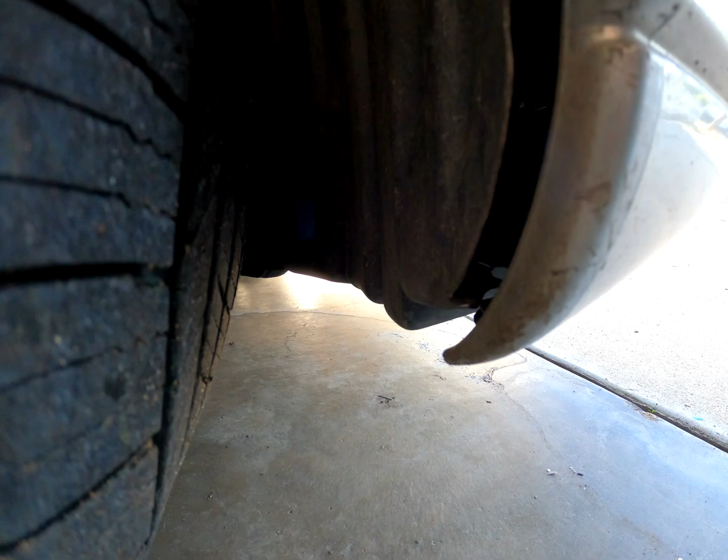That's the sound of the compressor. You can't even hear it from inside the car, but it vibrates and shakes everything. So I'm going to take a look at those bushings and replace them, because you shouldn't feel the whole car vibrating when that compressor kicks on. We'll see what those look like.

Okay, I've removed the passenger side headlight, and here you'll find the dryer and then the compressor. Now, if you look at this, that is a problem, because the bushings are totally shot. That's why we're getting the vibration inside the car, and that's why we can hear the compressor turn on. The solution to that is 3 of these.

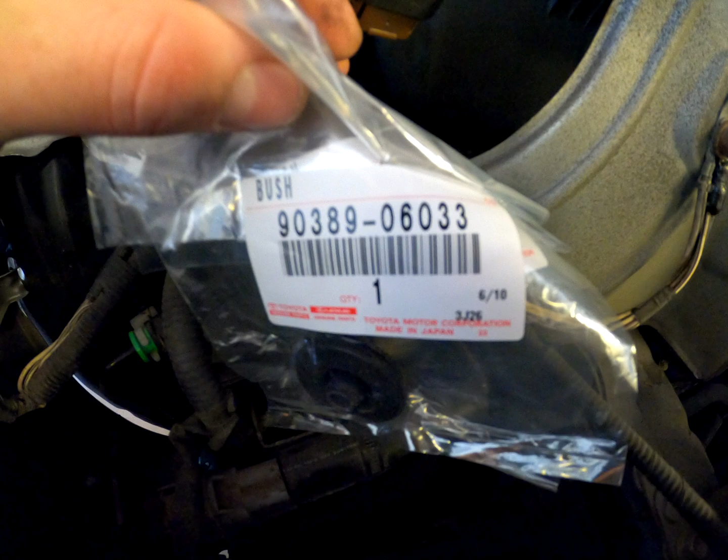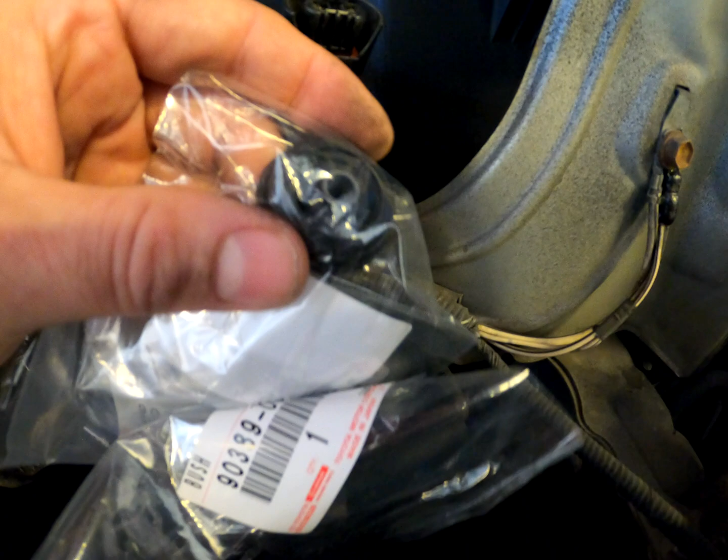Part number 90389-06033. These are available on a wide variety of Toyota cars and trucks that have air suspension. Just a nice bushing here, and obviously over time they're just going to fail and collapse. So this, like my channel and all my cars that I fix, it focuses on little stuff like this that nobody else is really going to care about or know or even realize there's something wrong. So there's something wrong here, we got to fix that.

So this will kind of be a 3-part video. We're going to knock out this, we're going to do the rear suspension, the air struts, and also the charcoal canister under the diff. So that'll be fun.

Now there are small O-rings here, I've got 10 of them here. Part number 90301-04011. These O-rings are for, you can't really see it on here, but there's a, actually you can't, it's this little thing right here. Hang on, let me grab, I don't even have a light. Hold on, let me get a light and I'll kind of show you what that's for.

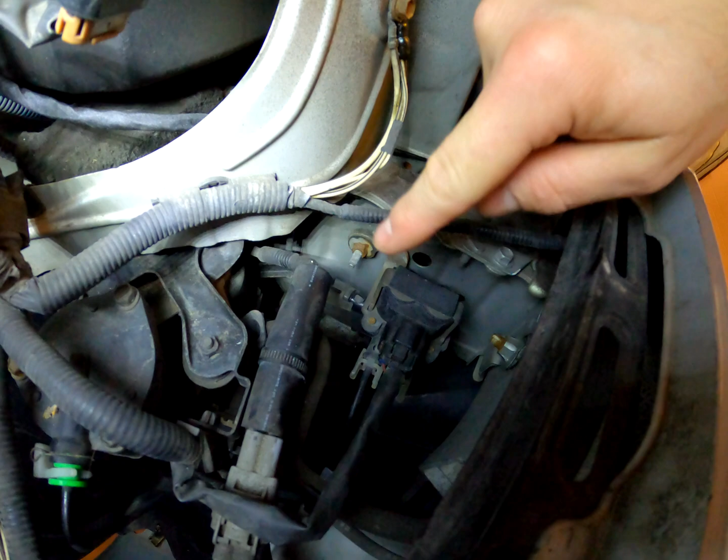Okay, so this is the front distribution block here. This goes to the 2 front struts. There's another one just like this in the back for the 2 rear. This has 5 of these O-rings, so 5 here, 5 in the one in back, and then there's 2 more for the dryer, but I didn't get those in time.

Man, it's just terrible. So I'm not going to touch any of these yet because my struts, I believe, are leaking down because of the struts being bad. But if you replaced all 4 of your struts and you're still getting air leak down, you got to know there's O-rings in each of these lines that you could be losing air out of. So just something to think about, and it's easy to get to, just pull the headlight out.

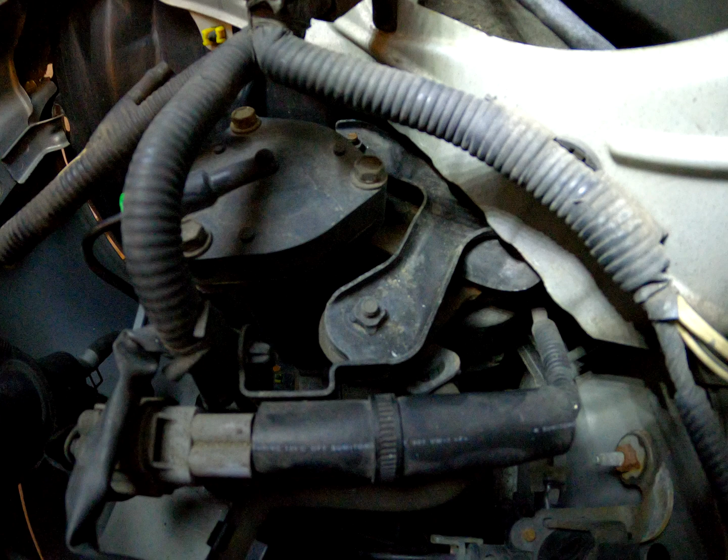And then the dryer, so the dryer has desiccant inside, just like an AC dryer. It takes the moisture out of the air that the compressor uses. I guess these don't really have to be replaced. In cold climates, if the compressor freezes, I guess that helps with that. So I guess you can replace it, but if it's never been open or exposed to air, there's really no point. It does look like you can take it apart and just refill it with more desiccant, I guess, if you're so inclined. But again, if everything's working fine, you don't need to touch the dryer.

So I'm just going to get in here, change these bushings, and then we're going to leave these alone for now. Once I get the 2 rear struts in, I can see if there's any leakage over time. If there's not, then there's no need to even touch this, and the O-rings are good. But I have them just in case.

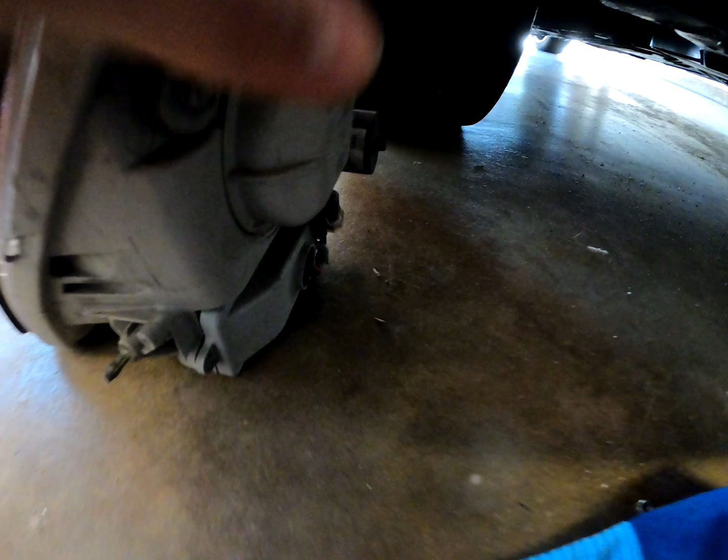Another thing, the headlights. On this, the 01 to 03, I was able to remove it without taking the bumper off. I think they changed that in 04 to 06. But there's like one little socket here for a mounting point, and then a mounting point here, and then one on top. I'll show you here. So there's this top mount here, there's this mount over here, and then the socket mount is over here.

There is no lower mount on these. So again, I didn't have to remove the bumper, which is kind of nice. I was kind of confused because it looked like from the parts diagram there is a lower mount, but I don't know. In case you didn't know, also, if these break off, you can buy a replacement from Toyota, and that replacement screws in right there. So they make brackets to replace these.

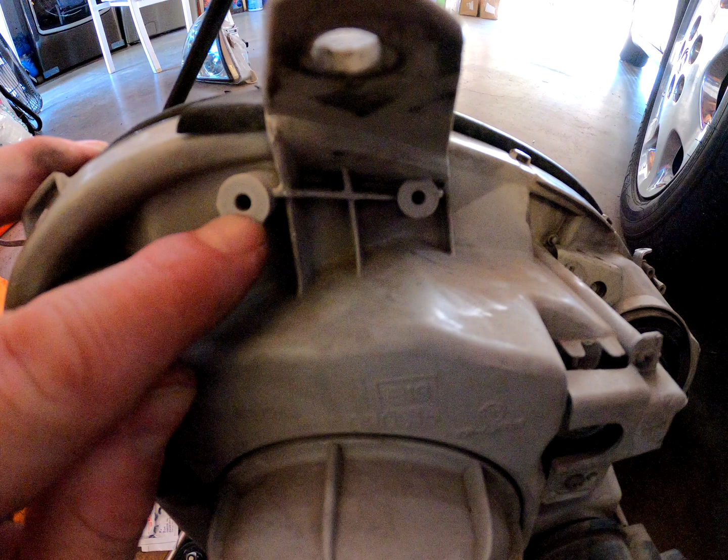This one too, I believe. Anywhere where there's a bracket and there's little holes like that, they'll sell replacement brackets you can just buy instead of buying a whole new headlight. So I'll put the link, or the part numbers, inside the video in case you have any issues with that. And this one we also have to buff and kind of seal.

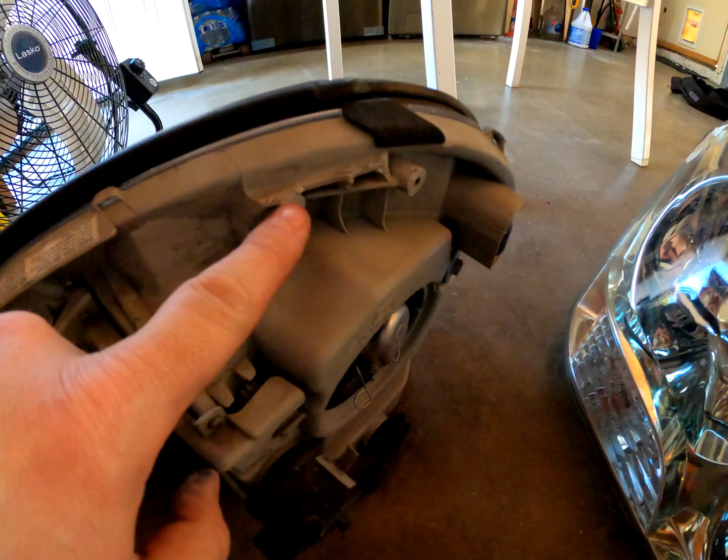If you look, I've already done this side like that. That looks pretty good. This side's a little bit faded. And then I have two more over here. This one here, but again this one's missing the brackets. Broken, kind of broken, broken here. So I'm probably going to sell one set and then keep another, obviously, for the car.

But just rubbing compound, they make like an activator spray, I think 3M does. And they also make like a wipe-on clear coat almost, UV protectant. So I'm going to put this on the driver's side. Passenger side's good. Also remember, check all your bulbs.

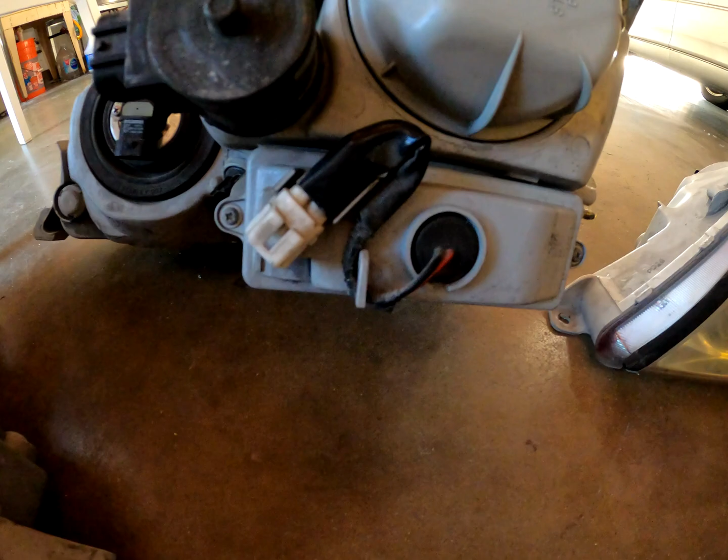There's a lot of bulbs here. Mine, this was out on both sides, so the running lights, this should be on. It's just a 168 or 194 bulb. Turn signal obviously in here. And then low beam, high beam. There's your low beam in there, I think, or high beam. And then the low beam and the ballast.

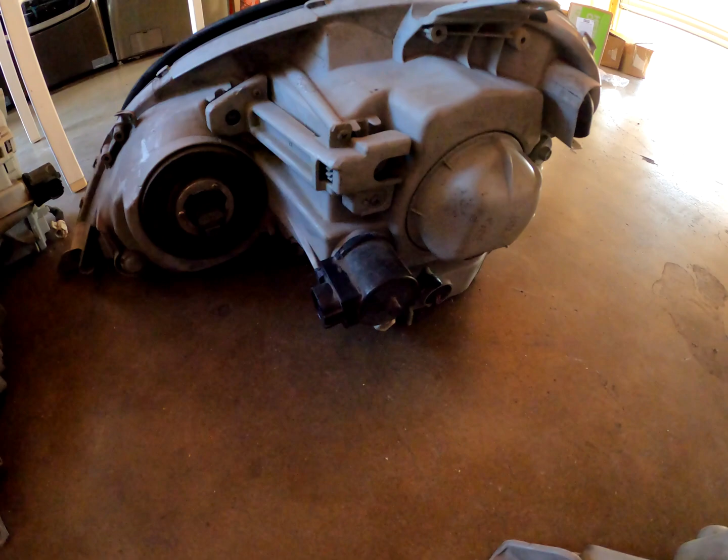Or this is the running light, the low beam running light here. So if this is flickering, mine was kind of flickering a little bit. I replaced it, fixed that. So enough on the headlights, enough on that.

I have to remove the... well, maybe I can get in there with my hand underneath, I don't know yet. All I gotta do is unbolt these, oops, these 3 bolts here on the bottom, just 10mm bolts, and then swap them out. So I'll do that, and then next step we'll kind of get onto the rear struts, remove the rear wheel, and see how that charcoal canister is going to be while we're back there.

And then before I forget, right behind the subframe you will see the rear distribution block. So you've got 5 more O-rings back here. Pretty easy to access, just right in the middle. Again, here's 2 on each side and 1 on the bottom. And if you're still bleeding down air, you want to change these O-rings out.

And then just in case you're wondering what it sounds like.

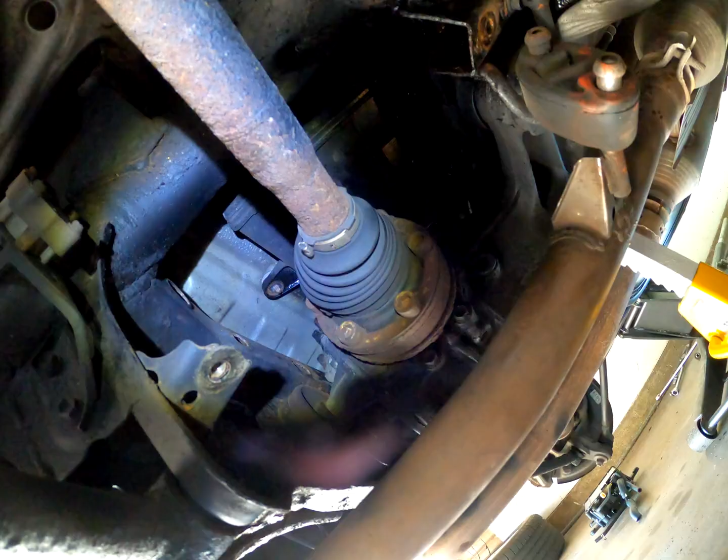Okay, we are under the passenger rear side. We've got the charcoal canister here. In order to get this out, we're going to have to remove this axle, 8mm Allen, just the diff side, and let it drop down.

But there's 2 nuts on top, or towards the front of the car. You can kind of see one there. There's one over there, and then there's one right there. So this is just half the battle. Now there's a bunch of lines and other things on the other side, and I'm stuck on the last one.

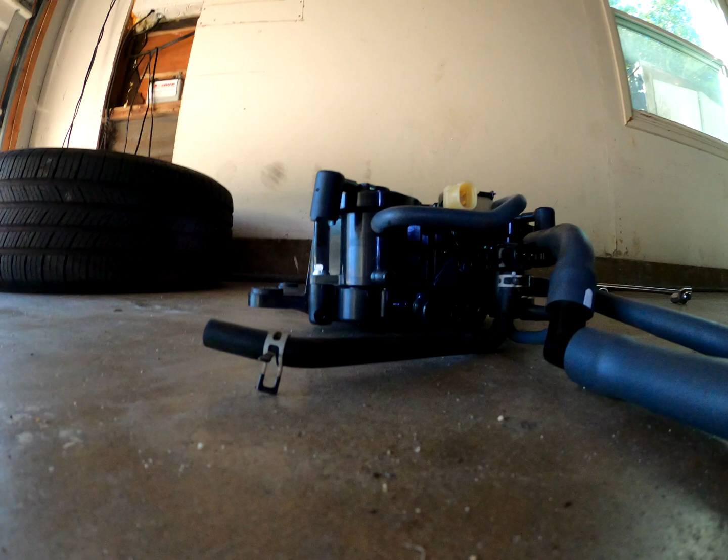So the best thing you can do in this situation is kind of compare it to what you've got on the new part, and hope that you can grab the parts on the car. That makes sense. So you'll see here we have this big vent, this just goes into the subframe.

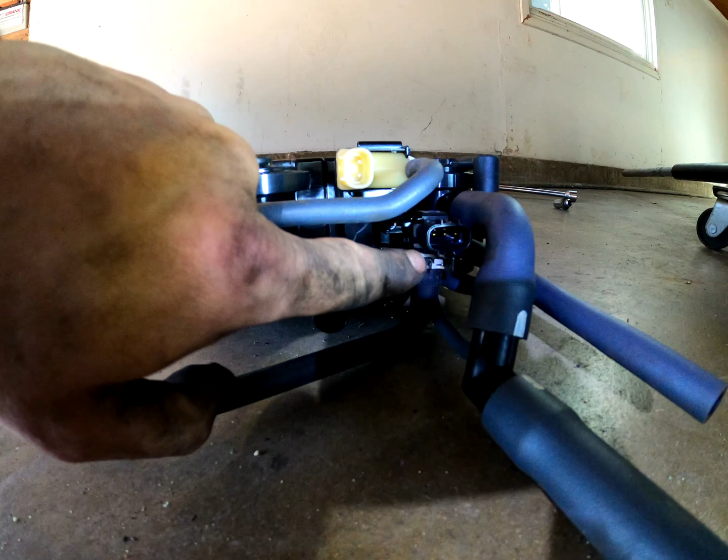This one goes onto a line, so you can pull these two off. You're going to have to unclip the two connectors, 1, 2. This is pretty straightforward. You can see this, and then undo the clamp, pull it off. And then...

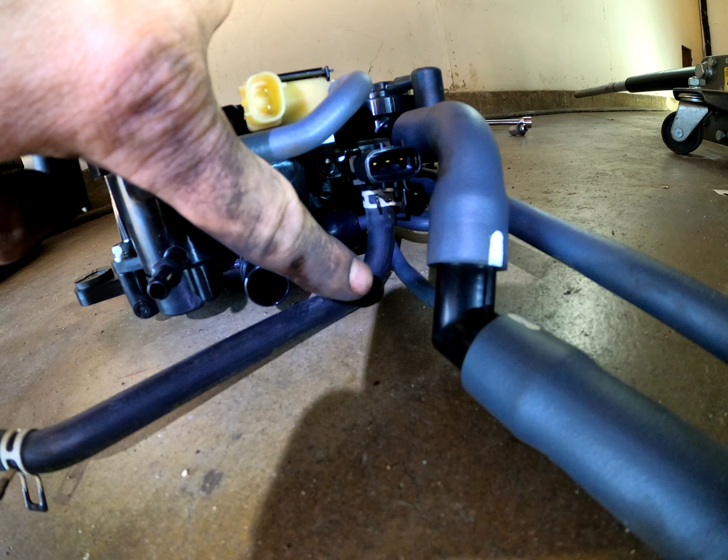This fitting here, you can pull the hose off of the adapter. So there's an adapter stuck on here with another nipple and then a hose. Pull that off, this one is an easy hose just to get off. And I'm stuck on this larger one. There's some type of clamp, some type of clamping device that holds the hose to this little ring. So I need to figure out how to release that with very limited space.

Alright, so from the passenger side, you can just barely look above the axle, and if you see way back in there, you can see all the hoses and the connectors. So best bet is just reach your hand up there and then start pulling things off that'll come off. And like I said, I'm stuck. The light is just terrible.

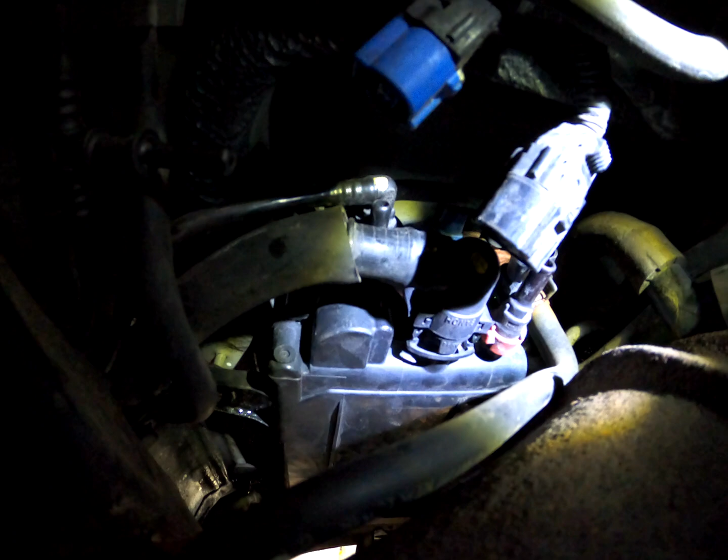Let me see if I can... let me readjust and then get a light in there. Okay. So, it's still terrible, but you can see that larger hose I'm struggling with. There's just some type of clamp I gotta release. And that's the last thing, and then it'll kind of drop down. But like I said, everything else up here, you kind of have to just feel around and do your best to detach it all, because there's really no other way of getting in here.

And then you see that adapter, that red adapter. So once we get the box out, we could swap that adapter onto the new one, and then I don't know if it's a valve or just an adapter or something with a nipple, and then swap on the new one.

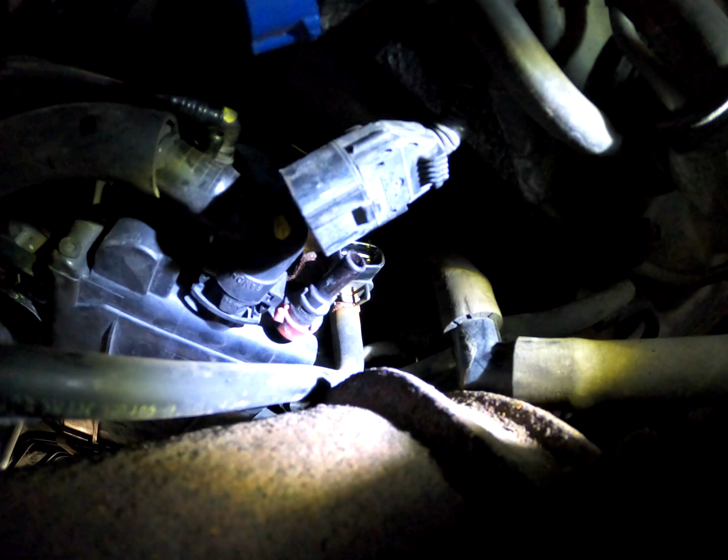I don't know, it looks like there's some kind of clasp that goes around that bigger pipe. I tried squeezing it, turning it, twisting it, and I don't know. I just have to keep on it and see how I can get that off of there.

But this is the driver's side now, we're looking up in this mess. They don't give you a lot of room to work here. But yeah, I'll get that out and then remove it, hopefully, and that'll be another part of the video after this.

Alright, so we got the compressor out. Here you can see the state of the old bushings, which are pretty terrible. The center spacer just came out with the bolts. One I accidentally broke, so I had to pull the whole bracket out and then tap it out.

These bolts have like a large washer on the end, and that's about it. I should have got a die to thread the bolts, but I did not. So here the old one just totally blown out as expected. This one's all cracked too. New ones are perfect, spongy, rubbery, just how they should be.

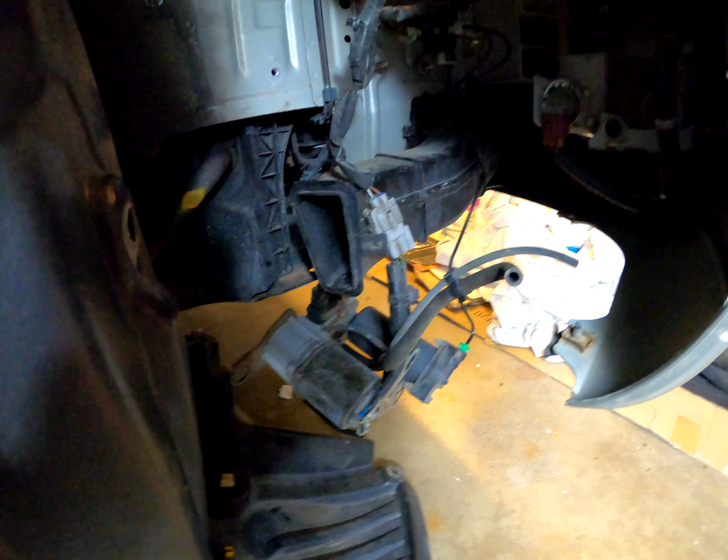Over here you will see what we're working with. I had to take all this out because again I had to get the bracket out because I broke stuff. But here you can kind of see the compressor right there and the dryer and the airline. So I'm going to get this back together. Nothing more to see here.

And I've been working on the back, the charcoal canister, in the meantime. I'm trying to get that out. So I'll get this back in and then we'll move back to the back again.

Okay, removing the rear axle. It's a 10mm Allen hex. You want to pound this on with a hammer. Make sure to jack up the hub so the axle is perfectly straight. The boot is not down.

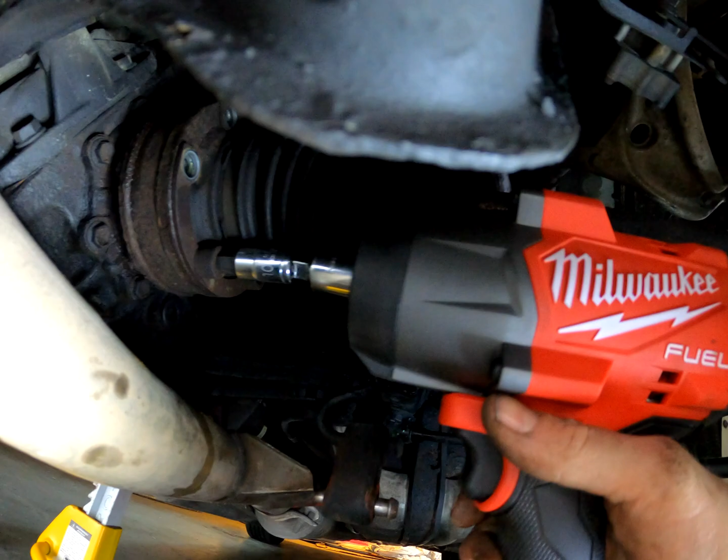That will allow you to get your favorite impact right on the end of this and easily pop the bolts off. Otherwise, you're going to risk stripping them, and that would not be a good time.

Yes, and then once that's out, we can sneak the charcoal canister down. We're just going to tap the axle and it'll pop it loose from the spindle or whatever you want to call it, going into the diff.

And then yeah, I'll check back in when this is off. If there's any issues, I will update the next portion of the video. But very important to keep the axle straight so you don't damage the boot. If you put it in gear, the diff still spins, so there's no way to really use a pry bar effectively, so you really got to impact these off.

Alright, so I had to take this back muffler off to get enough room to really crack the axle with the hammer and get it loose. But now that it's loose, we're going to be able to sneak that charcoal canister right out of that hole and get back on track because we're way behind on this.

Just like one thing after another, but yeah, luckily this exhaust was replaced from a rust-free climate, so everything pretty much came apart easily, twisted and pulled, and it just came off.

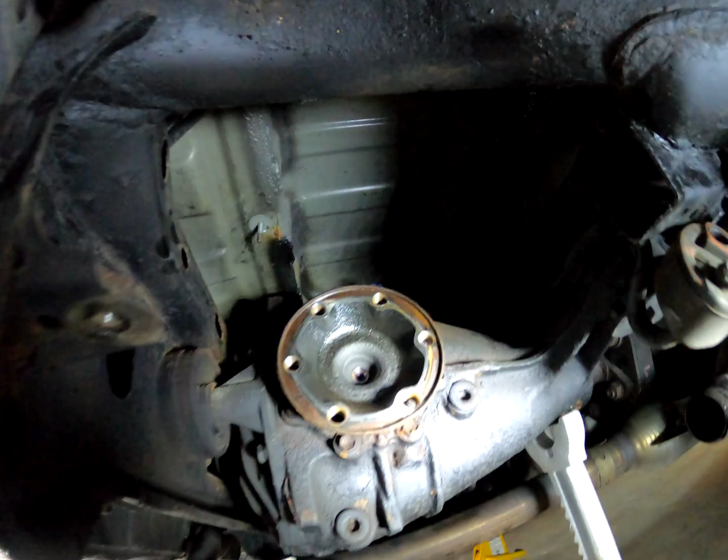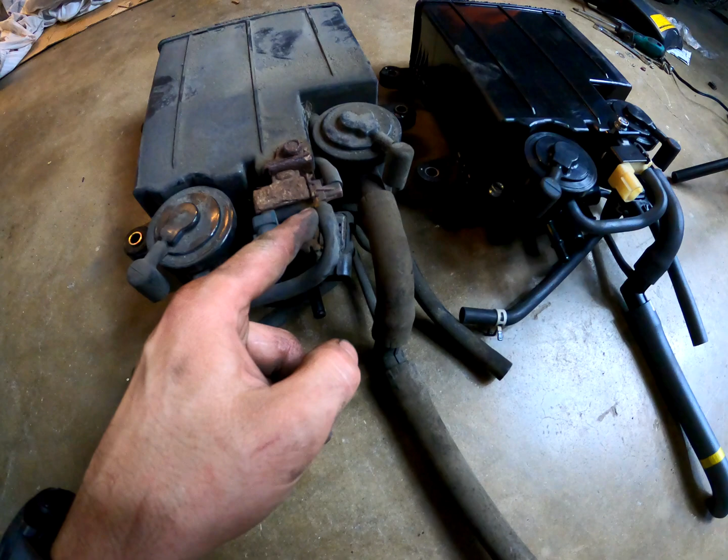Either they crack on the bottom, I guess, and leak, or I guess the solenoids could fail. Either way, I didn't want to pay a shop to diagnose the evap leak, and I didn't want to buy a smoke tester for 199 bucks or 100 bucks or whatever. I figure this is easy enough, it's old enough, chances are this could be bad, the thing could be leaking, but either way, it's time.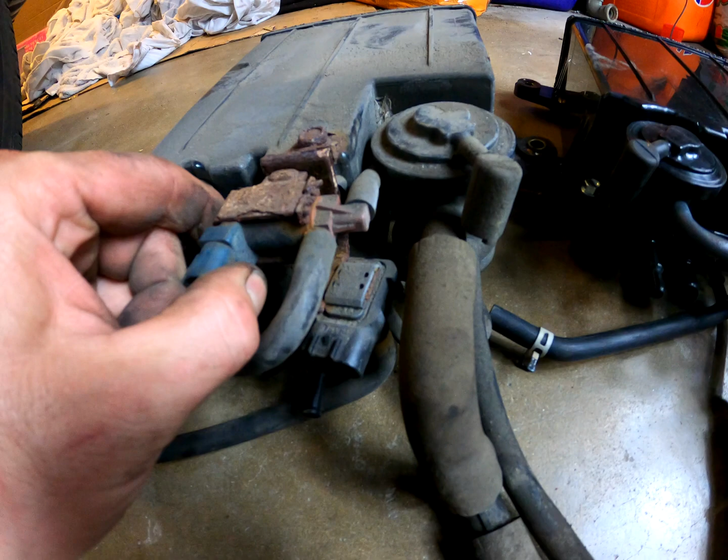It's very old. It's 21 years old, if my math is correct. Or no, it's not, it's an 01, so that'd be 23. So the new one, obviously it's brand new, but these solenoids have stood the test of time, so whether one of these is bad, I don't know. I'm just going for the whole thing because that's what I do.

So like I said, these are vents. These just vent into the subframe here. This connects, and then we got the 3 clip-ons, and we do have to move, or do we? Let me see here. So here's that red connector I was talking about, that's kind of stuck on this nipple. And then the new one,

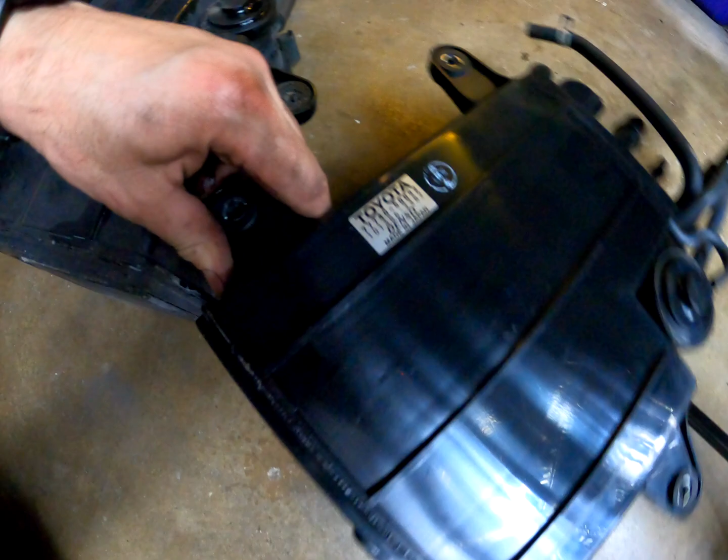50092. So this is 50090. So 92 could be, since this is an 01, 92 could be an 03 part number. Doesn't necessarily mean anything changed with this. It just could be the last revision of the 01 to 03 line, the Lexus LS430 line. I don't know, but I'm going to take this off, this one, and then just swap it over here.

Not much else to say here really, but people have had issues with these filling up with gas or whatever, or this cracking and becoming the leak itself. I don't really care, I don't know, as long as the code goes away and everything's good, that's all I care about.

But again, nobody could really say one way or another, is this code this? You know, we don't know. It could be the sensor, it could be the solenoid, it could be a cracked hose, it could be something in the engine bay, it could be a million things. But it's not very conclusive, like I said, on forums or Google or anywhere on what is the issue.

So I will swap everything over, get it back in, and then the next part's going to be the axles. Not the axles, oh my gosh. The struts, the air struts. Yeah, because we got the compressor bushings done up here.

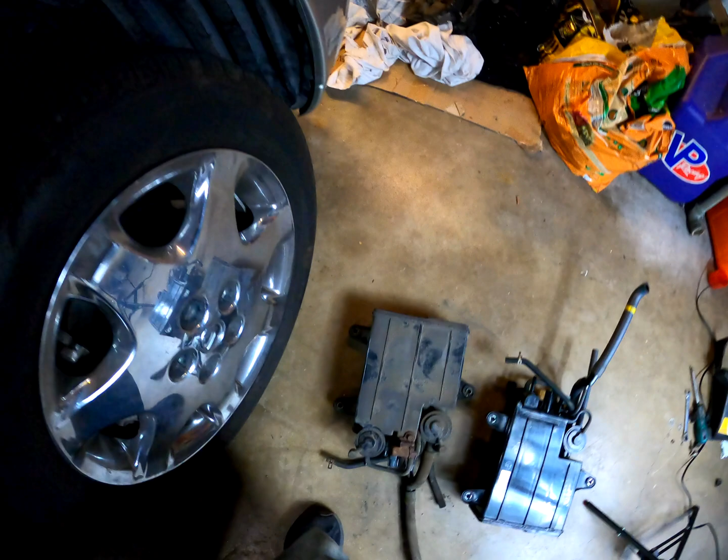I also wanted to mention this connector, this large connector. You basically have to release, there's 2 tabs on each side. So while you pry those and release them from the ridge, you have to push the entire connector simultaneously. So lift up those pins, or those tabs with a flathead, and then I just used my hand or another object to kind of put force on the actual plug itself to release it entirely, if that makes any sense at all. But you can kind of see how it operates. Those 2 tabs, there's like a ring and then 2 tabs that just hold the entire assembly on the ridge of the port. So it's like a 2 tabs release and then push it off.

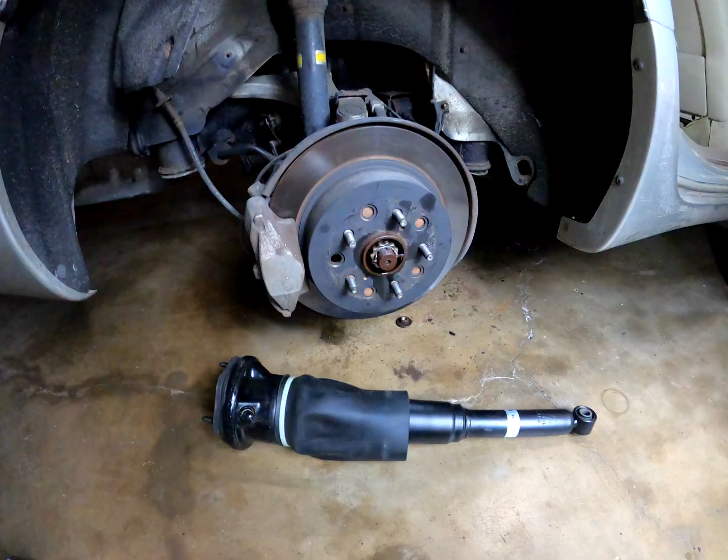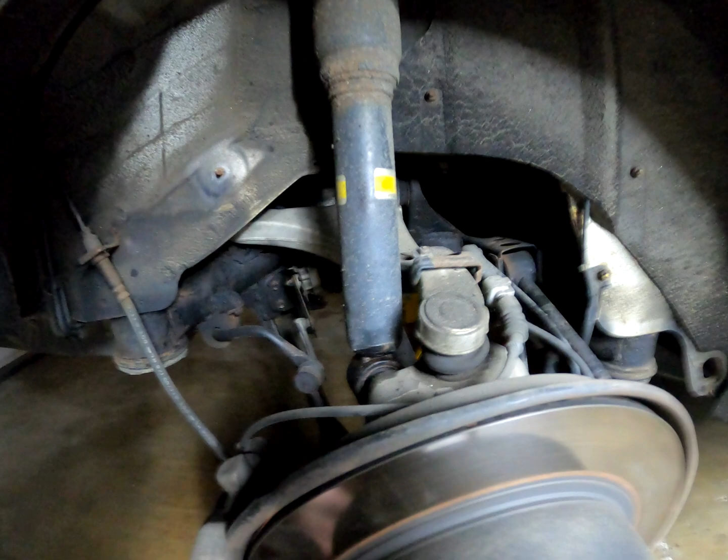Alright, moving along, we've got the right rear strut here. As you can see, the port is right here, and that aligns with where it goes up in there. You have one 19mm nut to remove the bottom of the strut.

And you can see how bad these are. The other one's even worse. It's all oily, but this is pretty bad. And then way up there you'll see where the airline connects. So you'll just have to remove this nut. It's a 10mm nut for this carpet to pull it back. So right now I got to go inside and then pull the seats.

Actually we can transition right over here. So the bottom, whether you have Ultra or not, there's just 2 locking tabs on each side. All you got to do is pull up just like that. Comes straight out. Don't forget about the plug for the heater.

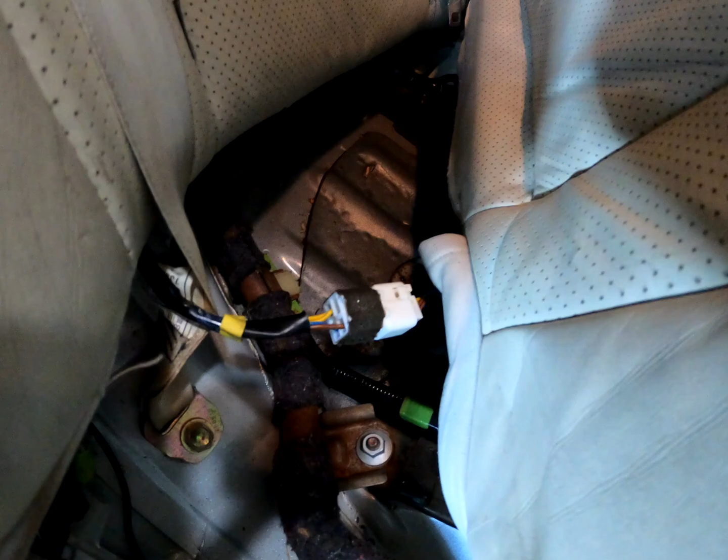I'm going to do the same on the other side, just off camera, so I've only got one hand here. And then there's several nuts on the bottom. You'll see 10mm nuts, I believe, that hold the top to the frame of the chassis.

You have to raise these seats because you have a cover and nuts on the top holding it. And then this whole trim piece kind of pops out just like this. I had this out already, so it came out really easily. And then you'll see there's a nut back there, barely you can see it.

And then the whole top will fold forward. After that's done, we'll have to see how the rear deck comes up to access the nuts. I don't know if we'll have to pop this off or not, but we'll figure that out once we get there.

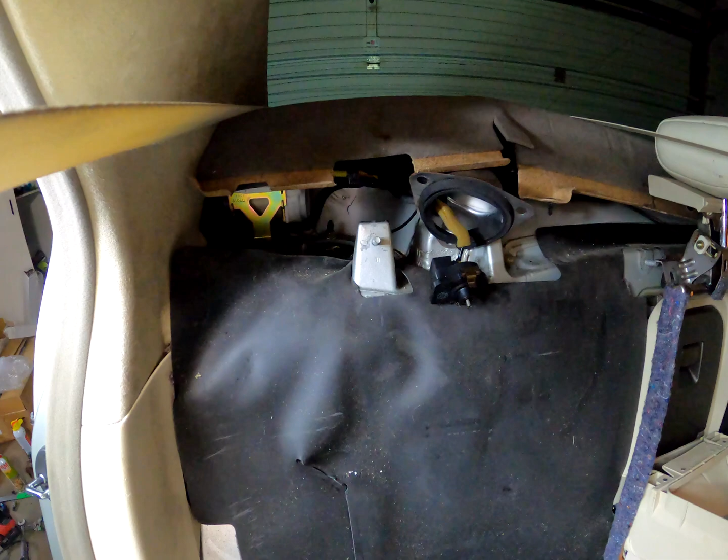Alright, so as expected, it was pretty easy to get in here. There's 3 14mm nuts. There's a cap with the actuator, and that you just twist and lift. And there's another 14mm nuts underneath that are torqued down that hold the strut to the body.

And there's just enough flex in this deck lid here. It's split right here, and you can just lift it up. There's plenty of room to get in there with a socket and a wrench. So yeah, you only have to angle everything forward. You don't have to remove the upper portions of the seats.

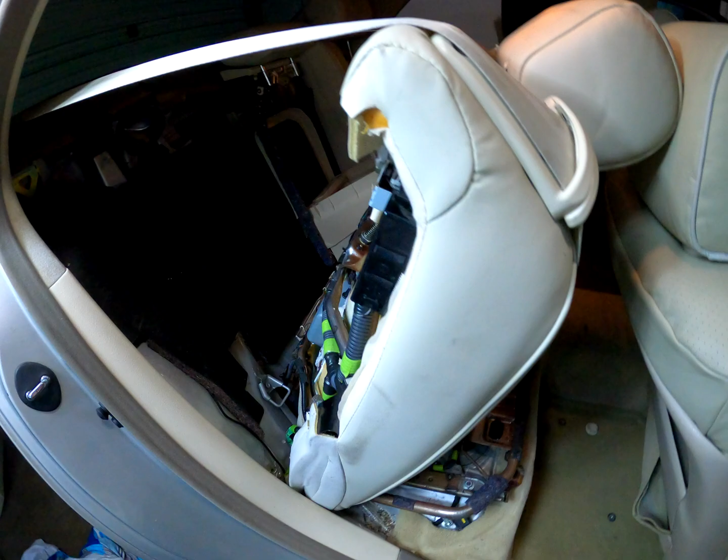So I will get back down here. This is just about as easy, if not easier, than the front.

So let's see here. Next I'll take my very handy PD 3D printed tool. I mentioned this in the last video. You clamp this around the airline and then just push this into the strut, and the airline just pops out. So it's very, very handy. I think they still sell these on eBay and everywhere else.

So I will release it and then loosen those top three nuts, and that's it. The strut will just drop on out of here. So really the next part of the video is going to be putting the new strut in, and then I'll do the other side.

And then I broke a bolt on one of the, it was like a plastic air dam thing under here, like a cross member type. I'll have to grind that and drill it out and retap it. But everything's done. Charcoal canister's done. The bushings and the air compressor, and then 2 struts are all that's left. So we are almost there.

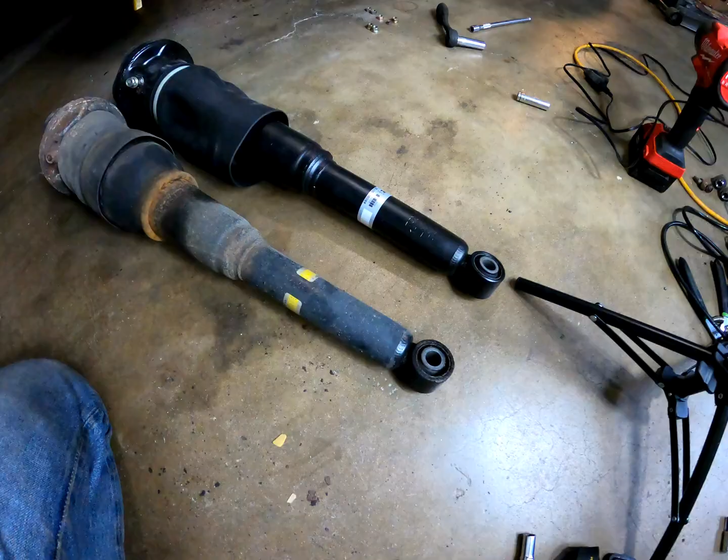And here's a nice look of both struts. See how badly rusted this one is here. Look at that. That's crazy.

So again, my original is the 01 part number, and this is the 03 part number. It does look a little different. You know, this, well, actually this is just pushed up. That's not it.

Typically, if you were to order this, like if you gave Lexus your VIN and you had an 01, this one would not pull up, because for some reason it's not like a newer revised part number. It's just a different part number altogether. So if you ran your VIN, you're going to come up with the 01 part numbers, but the 01 part numbers are not available anymore. So you're kind of out of luck, which is why I got the 03s.

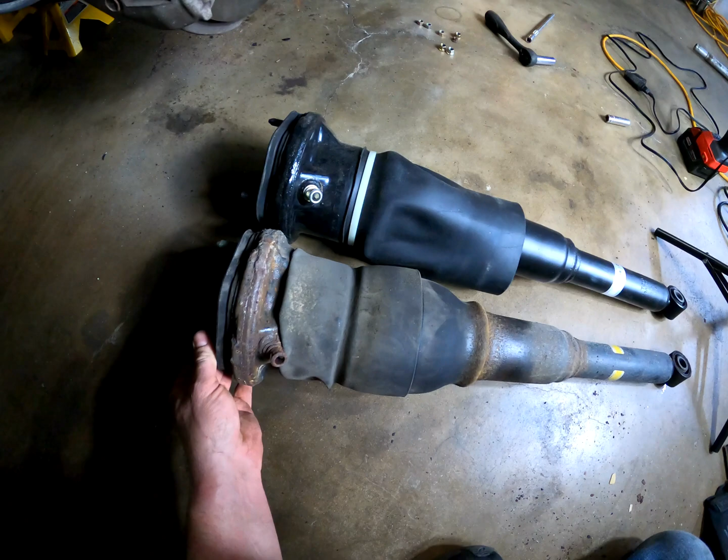But physically, they're identical, and I'd imagine everything else is the same with them. Like I don't know if they changed some valving or stiffness or whatever from 01 to 02 to 03, but yeah, this is how we're kind of getting around the issue of the 01s not being available anymore. I wish I would have known that earlier, because then I would have ordered 03 front struts, but the 01's front struts are still available.

So that's it. I'm going to get this one back in and carry on. Just want to show you how bad the driver's rear was. I mean, this thing is soaking wet. Pretty bad.

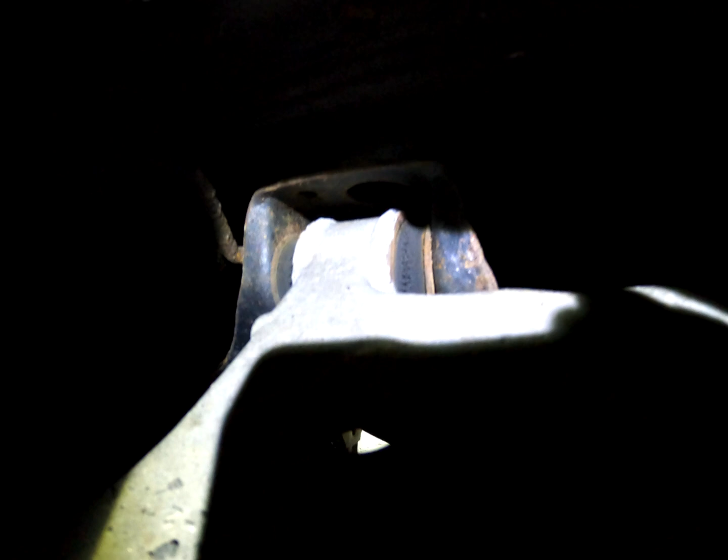And if you look at the upper control arms, they're cracking a little, but after 240,000 miles, that's not bad. That's really not bad. Could we replace them? Sure. Is it worth it? Probably not. I mean, it's just starting to crack a little. It's not like it's torn through all the way, but maybe we can do that at some point, just to make it a little bit more tidy back here.

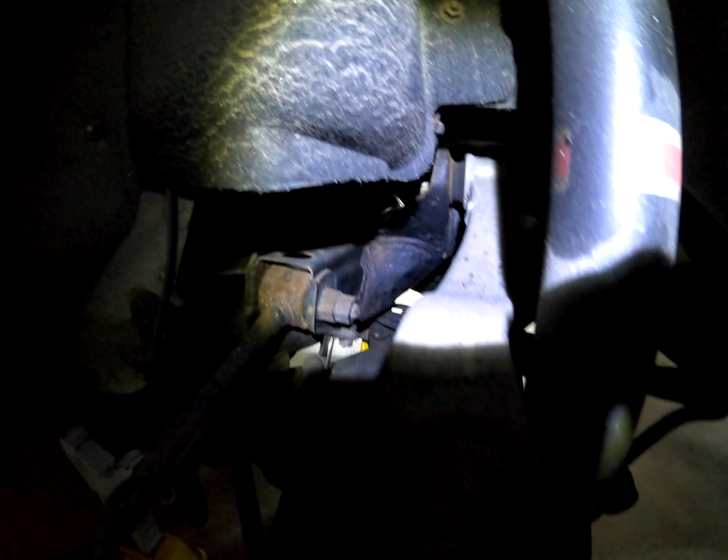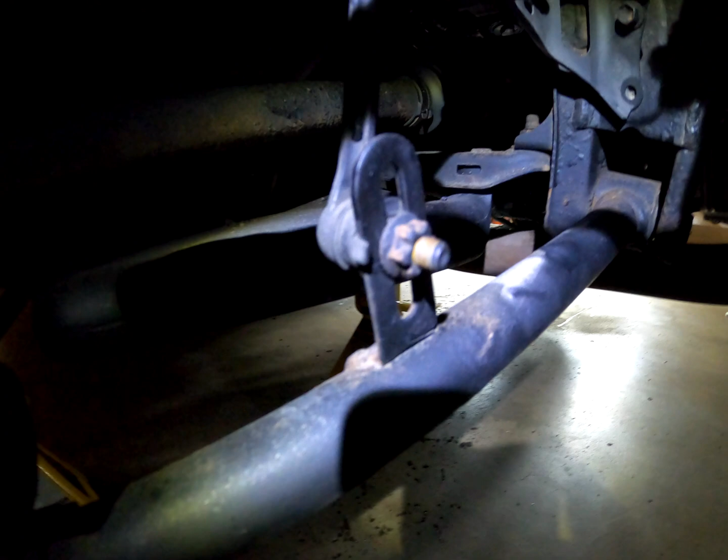Now you'll see these sensors on each corner. This is the height sensor, which raises and lowers the car based on the height the strut thinks it's at. This bottom nut is basically the adjuster. Turning it up and down will trick the computer and cause it to raise or lower that corner.

So once this is all done, we're going to hook up Techstream and check out all the values, do some measurements, and see if we're within spec before I even touch any of these, because I know some of the arms will break at the nuts. I do have extras, but I just want to see where it's at. Same for you - don't mess with these until everything is replaced and new. Then do your measurements and see where you're at before touching these, because once you touch one, it could mess up the other three and you'll never get back to where you were.

Not a big deal, just important to have the right software, Techstream like I mentioned, but we'll go over that. So we'll get this one out of here. The car really wasn't bouncing or clunking at all, which is surprising, but we'll see how much different it drives with the new ones. Can't wait, so I'll get this one out and we'll carry on.

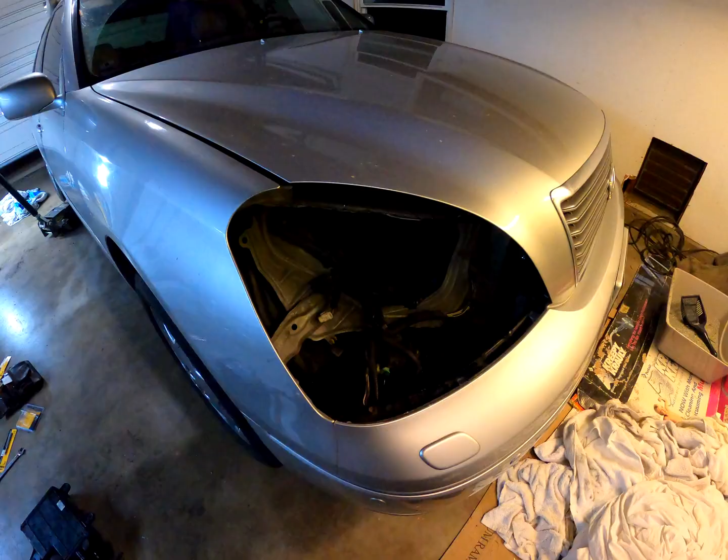Alright, moment of truth. You can barely hear it. Inside the car, yeah, you can't even hear it.

Okay, so when you lower the car, obviously these are not going to have air in them, so you want to make sure not to drop it all the way down. Let the compressor work and fill it up. This side too.

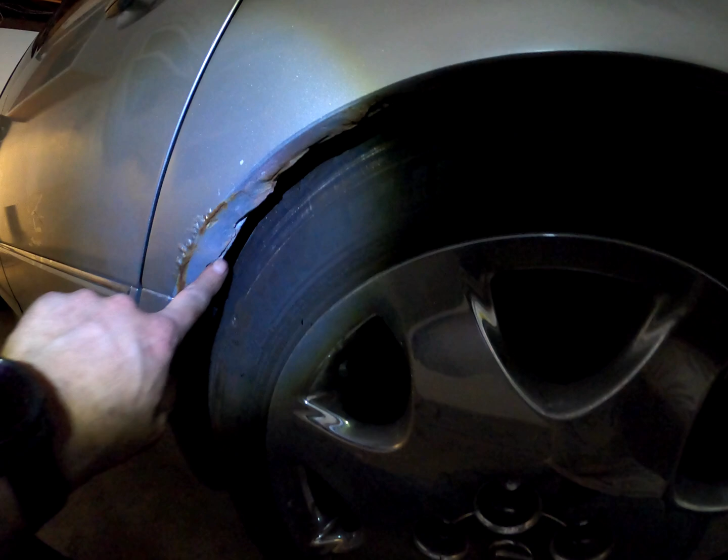This is kind of the only defect on the car, just some really bad body repair here, along the wheel well - must have got hit somewhere. Probably not worth it to fix that, but oh well.

So as you can see, it's raising up. Let it just do its thing, get to what it thinks is normal height. Drive around a little bit, then come back and do all the measurements, see where we're at. But man, that compressor - what a huge difference those bushings made, it's just so quiet.

What's interesting is, if you'll see here, the compressor actually pulls air from inside of the bumper, which is pretty interesting.

Okay, so now it'll level off. Typically it'll level this off and then lower this down according to comparing it to the back. Sometimes we have to drive it around a little bit for this to kind of go down. But the jack is still under it, so we'll just remove that all the way.

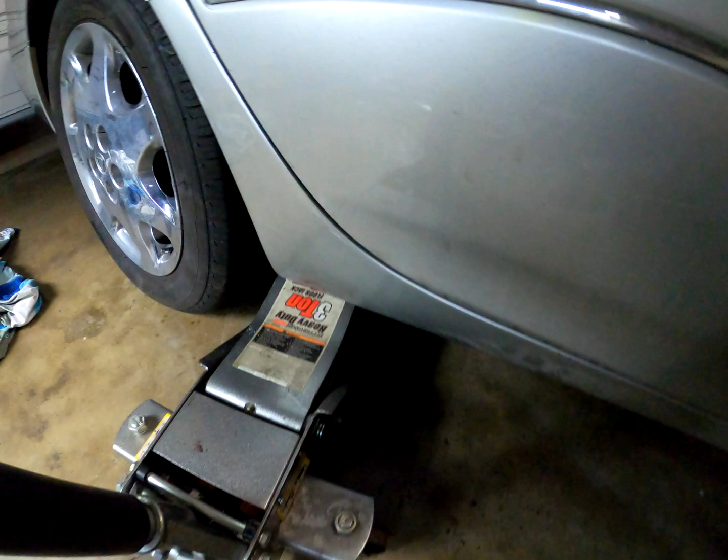And see what we're working with here. So we've got, I'd say, a two finger gap in the right rear right now, and about the same, two finger gap, in the left rear. You can see our new struts in there. Very nice. I can't see much under here.

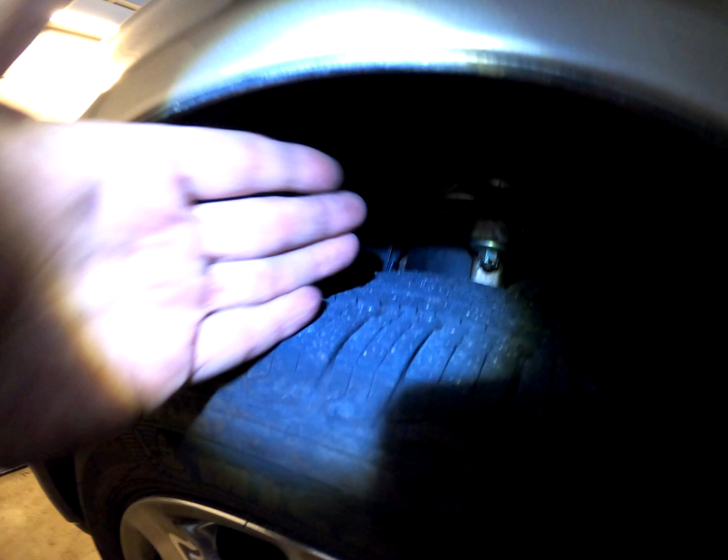What do we got for the driver's front? So the fronts are about a four finger gap. These are quite large, so we'll probably have to work on this, lower this a little bit. That'll probably show up on our Techstream data feed. Although it is typically normal for the front to be a little bit higher than the back, just by design, but it looks pretty good. So we'll do a test drive and update the final part of the video with the Techstream readings.

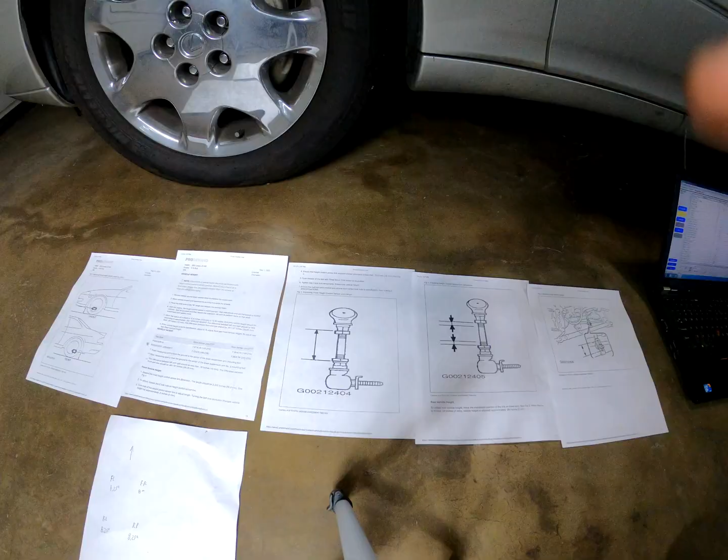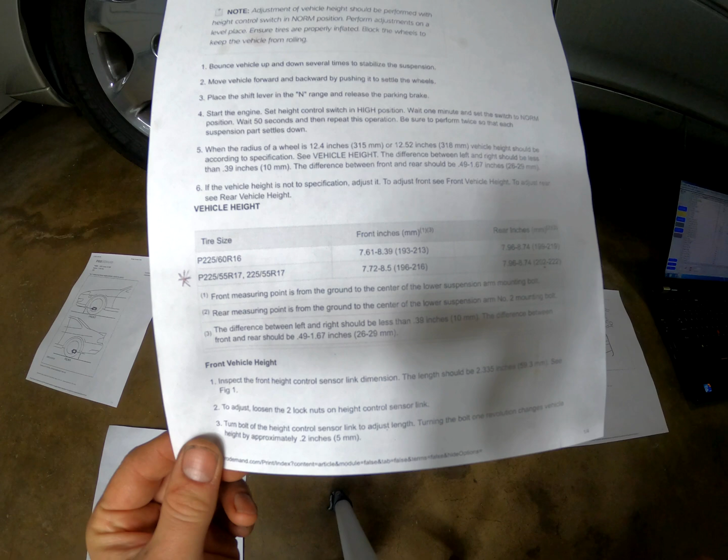Okay, in the last part of the video we're going to discuss the height adjustment. Obviously it should be a normal height, not high. Bounce the vehicle up and down - basically just want to make sure the suspension's level. Let's see here. So the difference between left and right should be less than 0.39 inches, so greater than a quarter, less than a half. If the vehicle height is not to specification, adjust it.

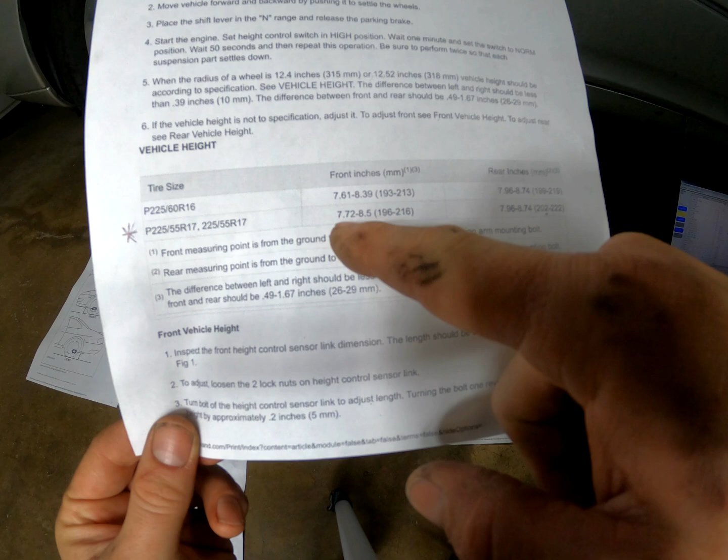So here it shows you the tire sizes - you have 16s versus 17s. Now the front height, in my case, I want to be between 7.7 inches and 8.5 inches. And then the rear, almost 8 inches to 8.74. So I'll cut to the chase: my front left was 8.25, front right was 8, and then the rears were both 8.25. So I'm within spec, I'm good to go. I could adjust the front right for another quarter inch, but it's not vital.

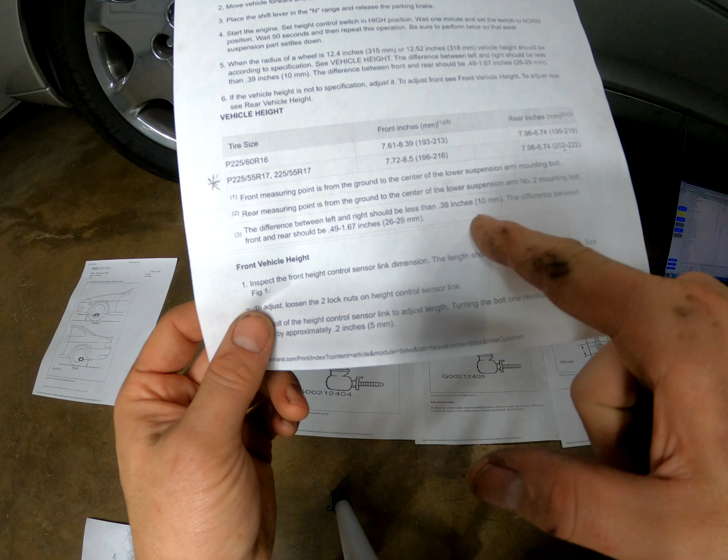So front measuring point is from the ground to the center of the lower suspension arm bolt, same at the rear. Again, the difference between left and right should be 0.39 or less. Difference between front and rear - there's a front and rear balance too, you have anywhere from a half inch to 1.67 inches. So your measuring points are - here's the front, you'll just see where it mounts to the subframe, and then the rear, just find the bolt for that lower control arm.

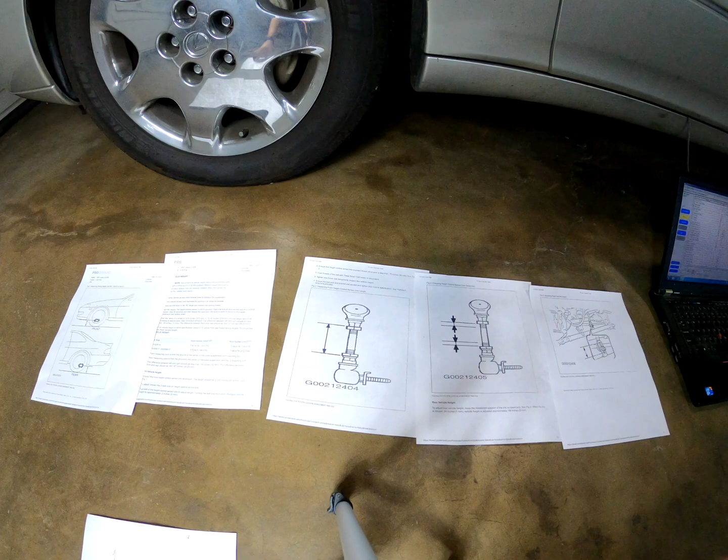So I didn't have to do any changes. I don't mess with any rods or anything. In case you do,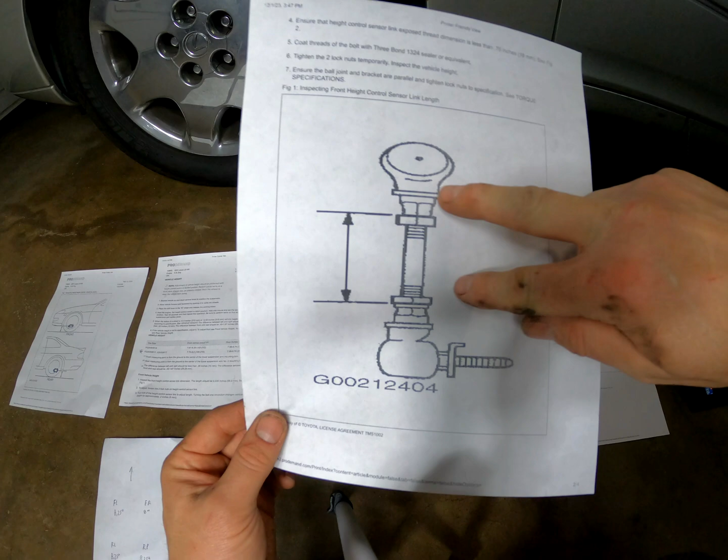Here's the front links. This length here should be 2.335 inches, the distance between that and that. So this will get you close. If yours is adjusted or way off, you want to get it back to 2.335 inches.

And the rear here, so here's the rear. And then again, it shows you where to adjust it. There's a little bracket on the control arm, up and down.

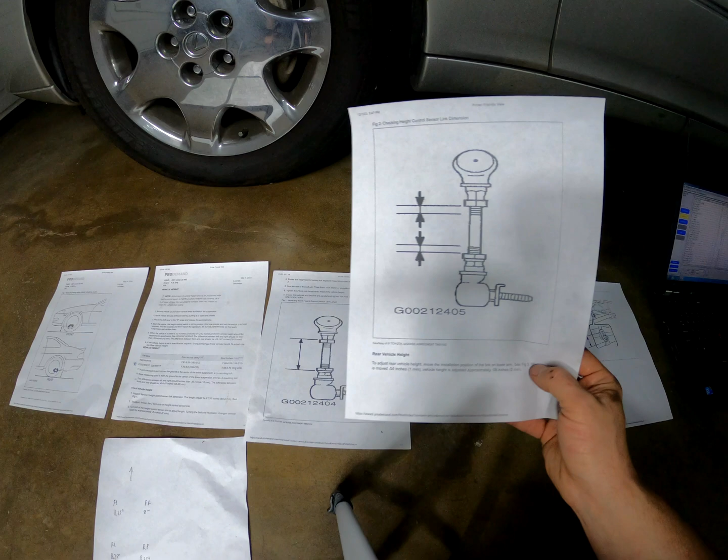Let's see if there's a rear length. I'm not seeing anything about a rear length. I just have the front one on here. Let's see. Yeah, I don't know. It doesn't tell you what the rear length is supposed to be, for some reason.

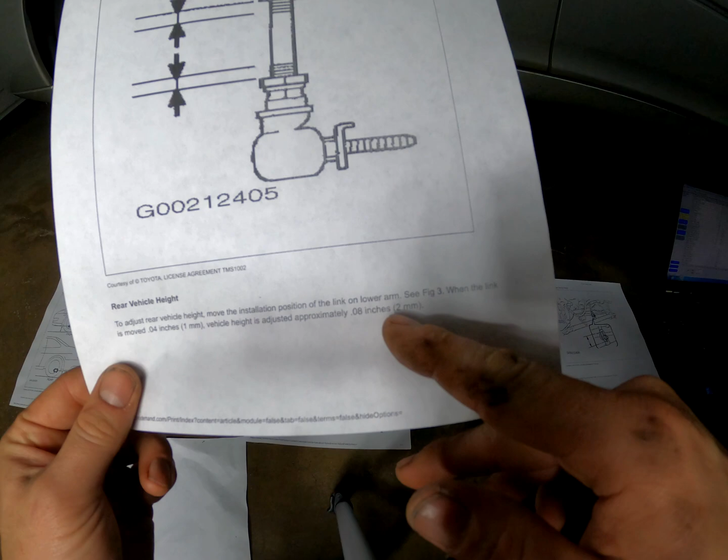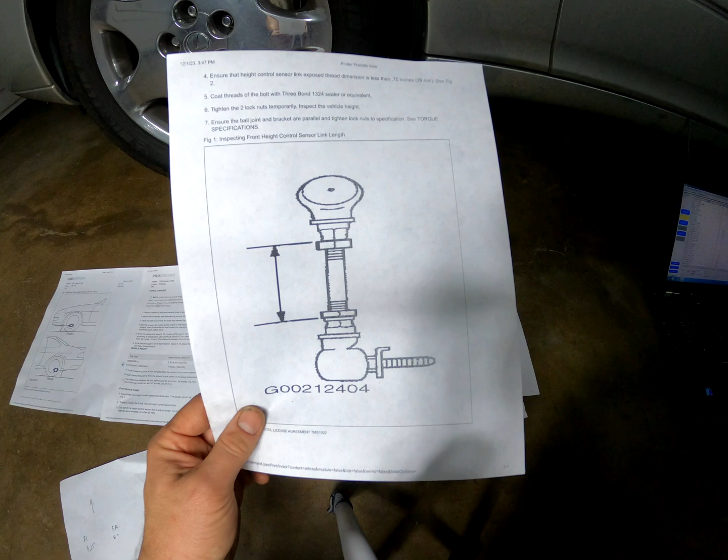So that is pretty much it. It doesn't say anything about an order - you have to adjust them left, right, front, back. Just kind of start with the arm or the adjustment lengths, and then you can do your actual adjustments after that. It might be easier just to find a used assembly, like the sensor and the arm that has not been touched, and just bolt that on your car. Because once you start adjusting things, it's really hard to get back to normal.

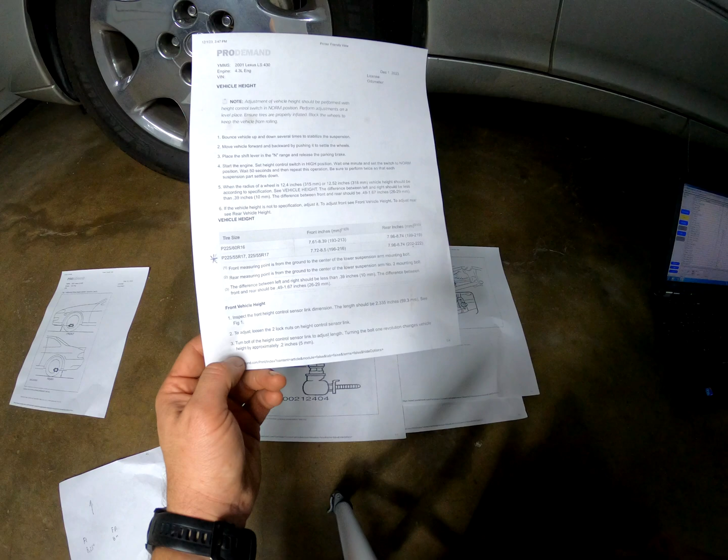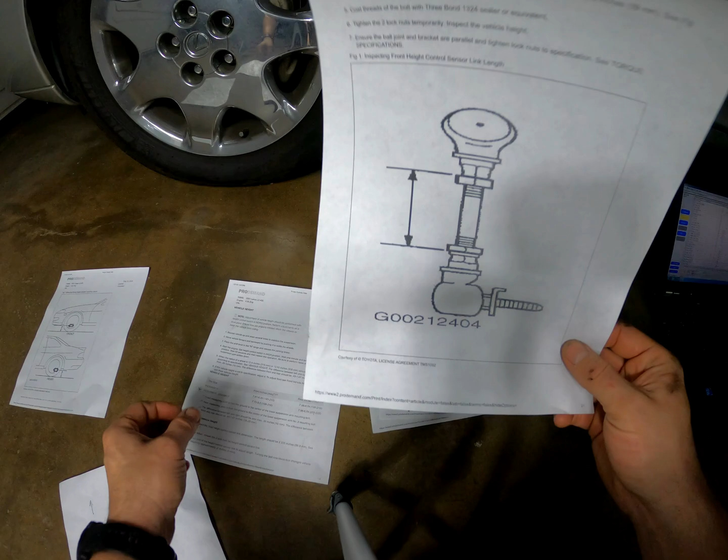Let's see if there's anything else in here that's important. Not really. So then I guess if you're adjusting this, it says turn the bolt of the height control sensor link to adjust the length. If you turn the bolt 1 revolution, it changes the height by 0.2 inches - about a 1/4 inch vehicle height. So there's 2 adjustments technically. If you make this rod longer, or if you adjust it on the control arm, you have 2 points of adjustment.

So you don't want to overcomplicate this. It's pretty simple. And then we're going to go over to Techstream here.

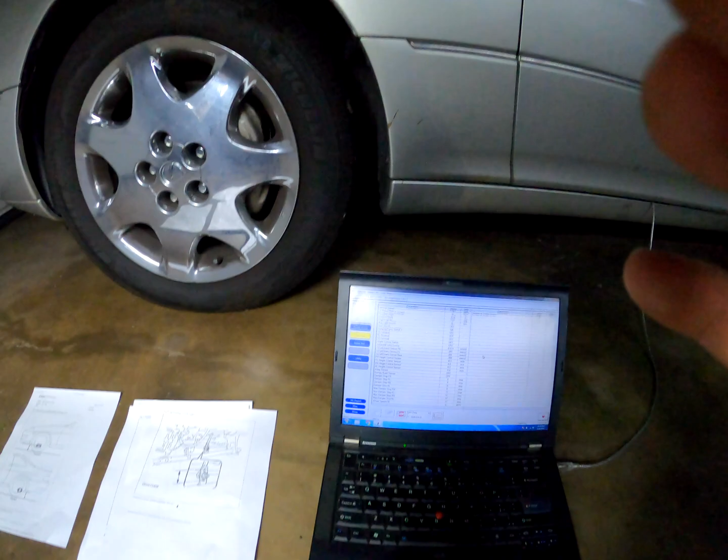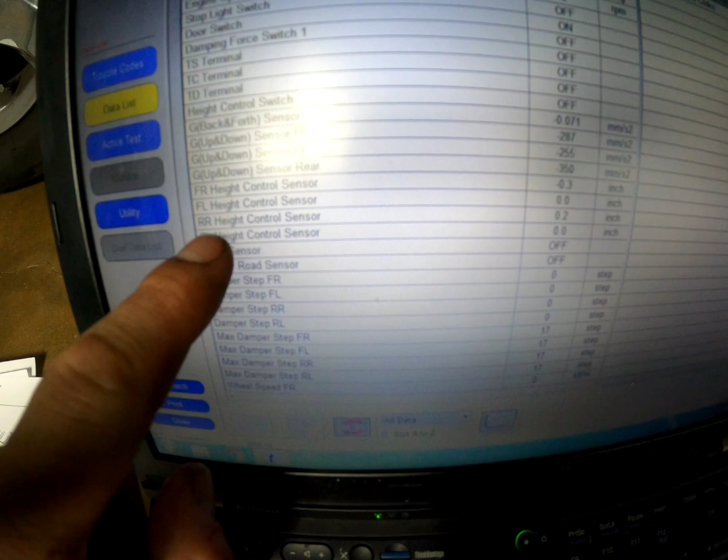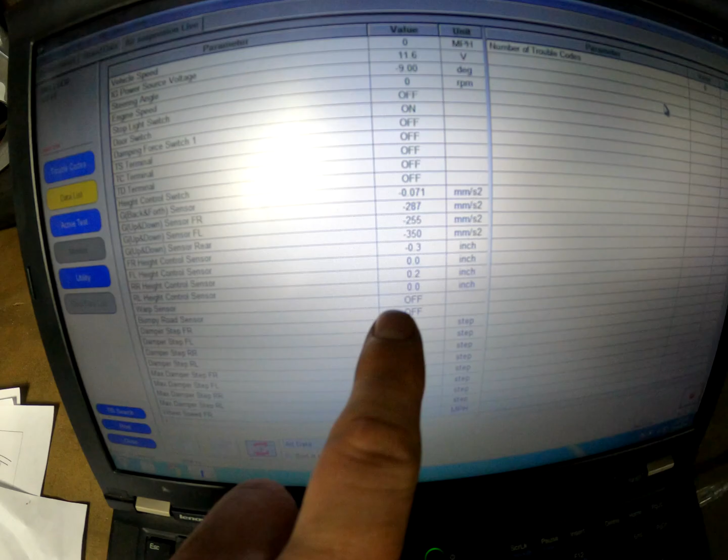So obviously this doesn't mean it's the actual height - the computer doesn't know the height from the ground to your control arm. I don't know what this is actually reading or what it's comparing to. So I guess ideally you want to be at 0. So if anything, we would have to make a slight adjustment to the right rear and then a slight adjustment to the front right to make everything within spec. But like I said, it's such a small difference, I'm probably not even going to touch it.

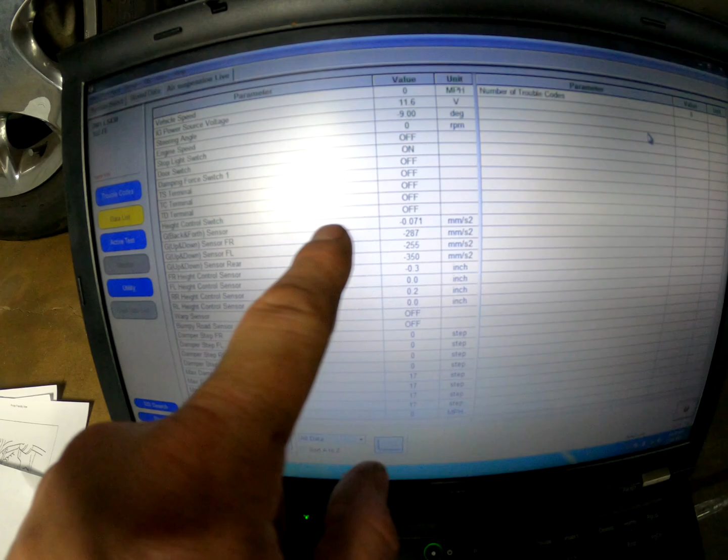This also shows you the damper steps, which are the things mounted on top of the struts - the electronic steppers, if you will. G sensors right here - G up and down, sensor front right, front left.

Yeah, there's nothing really else interesting in here. What else can we look at? Ooh, look at this - front left wheel up, down. Oh, you got to turn the car on though. So the test will adjust the height of the front left wheel. Vehicle height status can be found on the data list. So it looks like you can raise and lower each wheel, just to make sure everything's working, I guess.

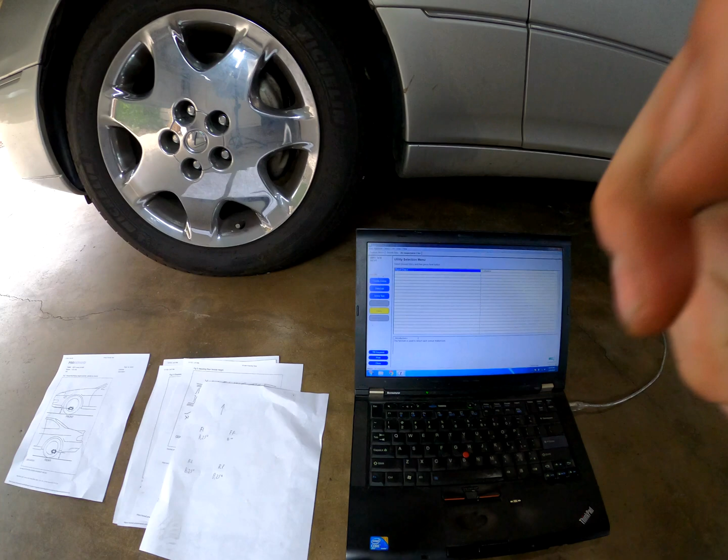And let me actually try that. I'm going to start the car and then we'll try that. Alright, well for some reason it didn't work - it won't adjust the strut up and down. Don't know why. Sometimes techstream is weird like that.

Just want to check and make sure I cleared all the codes for the emissions, the charcoal canister. So I just want to see there's nothing pending, nothing on. We'll see if anything turns on the next couple hundred miles, but so far so good.

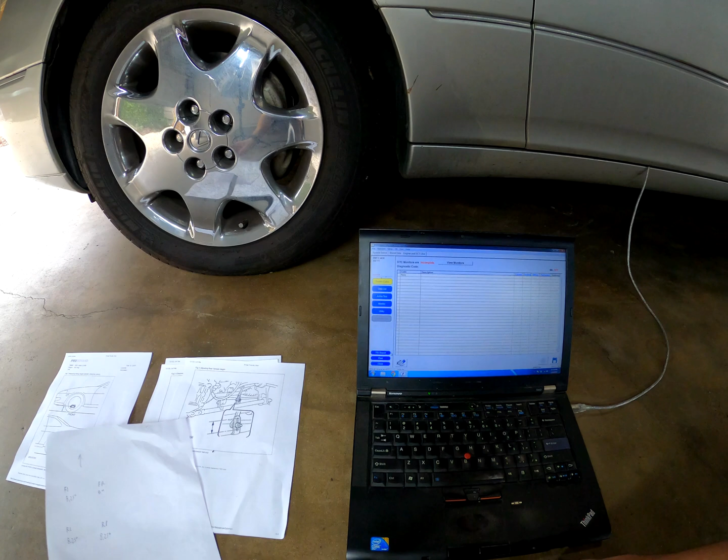And that's really it, so if you have any questions, let me know. Pretty straightforward, simple process. Rear struts, I'd say, were a little bit easier than the fronts, just because you don't have to mess with the control arm. And aside from a few broken bolts and having to tap some stuff out, the process went pretty well.